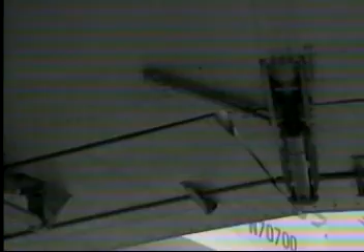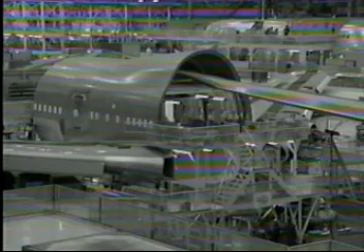Boeing company has made some of the most successful planes in aviation history. This plane, the 707, was the first of the new generation of jetliners. It first rolled off the assembly line nearly 40 years ago. In the years since, Boeing has given the world's airlines plane after plane, in a relentless succession of sevens: the 727, 737, followed by the 747, the famous jumbo jet, and most recently the 757 and 767. Now the company has decided to add yet another plane to the stable, the 777.

It's time. The world is ready for a new airplane, an airplane that will take us into the next century, designed and built by people empowered with forward-thinking ideas, by a company that knows the airplane business inside out. Introducing the Boeing 777.

Each week, there's a chance for some of the 10,000 people involved in the 777 project to meet senior Boeing executives. Today, they get an explanation of why the world needs a new Boeing airliner from Alan Mulally, Vice President of Engineering.

The airlines of the world told us they wanted an airplane bigger than a 767, but smaller than a 747. And we said, why don't you buy 767s? They said, we want an airplane that's bigger than the 767 and smaller than the 747. So we said, well, that costs a lot of money to make a new airplane. And of course, you know what they said again: we would like an airplane that's bigger than the 767 and smaller than the 747. You know, satisfying your customers is really hard work.

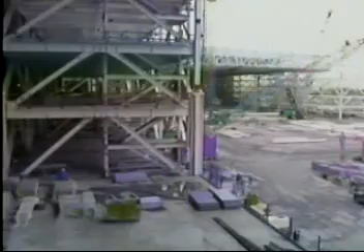Boeing has promised its customers that it will begin delivering the new planes in May of 1995. Behind that promise lie dramatically new techniques and new tools.

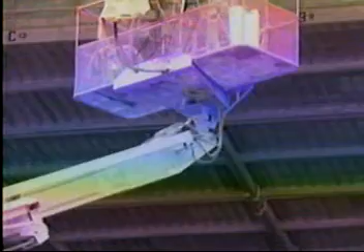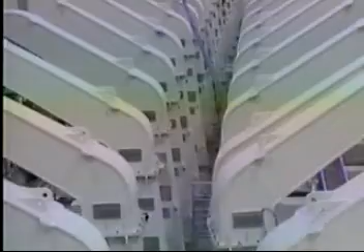This is one of the world's largest tools. When this giant rig is working, it will be capable of assembling the wing spars for one plane every 3 days.

To get an idea of how big the 777 will be, here's a smaller Boeing plane, the 737. Like the 777, it has 2 engines, but there the comparison stops. The 777 looms over the 737 when they're side by side. Its engine is the same diameter as the body of the 737.

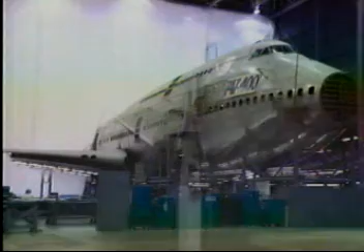The horizontal stabilizers, the flat parts at the back, are almost as long as the wings of a 737. The 777 will still be smaller than the 747 jumbo jet, although after 25 years of improved technology, it will have almost the same range and capacity.

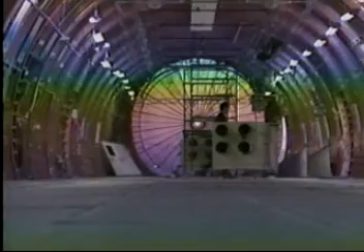With previous Boeing planes, a full-size mock-up like this 747 had to be built during the design stage. It's a plane that never flew. Complete in every detail, it was the only way to ensure that all the parts would fit together before going into production.

To build the 777, Boeing has switched to a pioneering computer-aided design method. 8 powerful computers have been linked in what is the world's largest collection of mainframes, joined together for a single purpose. The system is called CATIA.

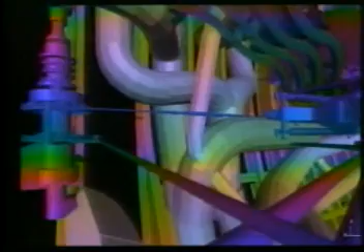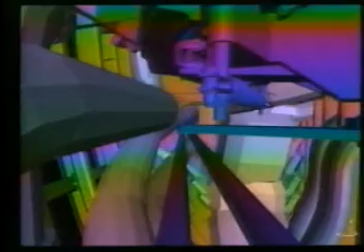Within the computer are precise descriptions of every structural component, every duct, every wire, every single fastener that will eventually go into the plane. It's called a digital mock-up because it allows pieces to be moved around, changed, and checked to see that they don't interfere with other pieces, what used to be done with a full-size physical mock-up.

CATIA is part of a major change in plane making that means engineers share the design task with manufacturers instead of finishing their drawings and passing them on, as they used to.

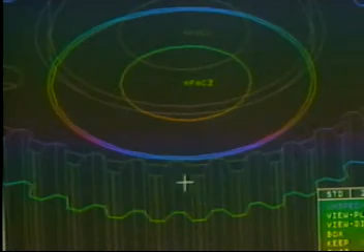The old throw-it-over-the-wall business of, here's what I insist be the case, now do what you can with it - that's gone away. But in order to really make it go away, you still wind up throwing it over the wall. You just have to accept it when it's thrown back, and that's the difference.

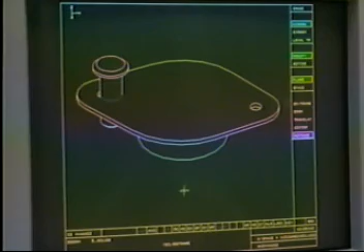The bane of every designer's life is when one of the parts he's designed gets in the way of a piece designed by someone else. But with CATIA, any interference between 2 parts shows up in red. And I do indeed have a little problem here, but it's a very small one. We haven't released any drawings yet.

Here we go with the stresses in the model in this particular area. What I did was zoomed in right here. These designers have discovered that one of their components is thicker than it needs to be in certain areas, and you can see in this area, we've got some low stresses.

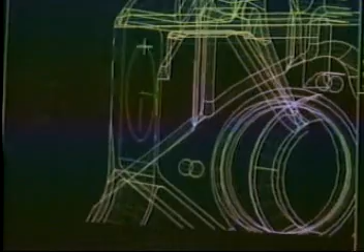Using the CATIA system, they create a hole in the piece, lessening its weight without changing its function. The system now recalculates the stresses to show that they are within acceptable limits, and works out how much metal will be removed by creating the hole. In a plane that weighs over 500,000 pounds, the small weight reduction, about 1/5 of an ounce per door, is still an important saving.

The 777 will be powered by 2 large engines. With the increase in power and reliability of jet engines over the years, there are cost and safety advantages to using 2 powerful engines rather than 3 or 4 that are less powerful.

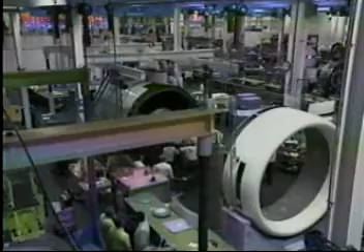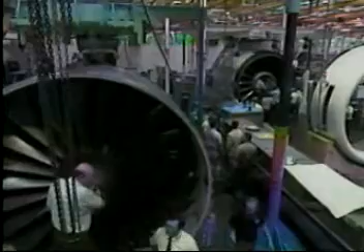The engines will be tested on the ground in 3,000 simulated flights, several engine lifetimes under normal flying conditions. Even if one engine fails, the 777 should be able to fly on the other for up to 3 hours, allowing the plane to be used on flights that cross the world's oceans.

As far as flying over water in a twin, I'm very comfortable. The airplane can fail an engine on the runway, and it's either going to stop or it's going to fly, and we designed it to do that. It can fly en route on one engine. I've probably spent hundreds of hours in these kind of airplanes on one engine, so I'm not concerned about that.

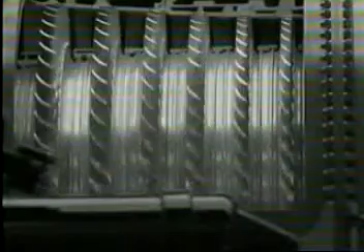The job of a jet engine is to create a thrust that propels the plane forward. Air is sucked in and compressed by these blades, then it's heated to very high temperatures by oil burners. Most of the heated air rushes out at high speed, while the rest turns turbine blades which drive compressors, helping to suck in more air. Each 777 engine will generate a thrust of up to 84,000 pounds.

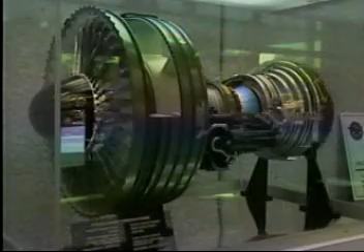Some of the 777 engines are being made by Pratt & Whitney. Today is a special occasion: maintenance engineers from the companies that will buy the plane give their views on the current engine design while there's still time for final changes.

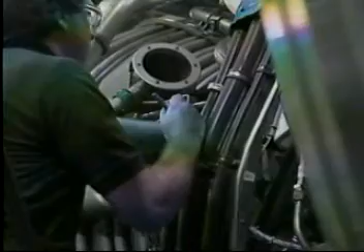The engineers will be allowed to swarm over the engine, poking screwdrivers, wrenches, and flashlights wherever they like. Their question, on a wet and windy night in Tokyo or Chicago, will it be possible to replace a part that is several layers deep in pipe, tubing, and cable?

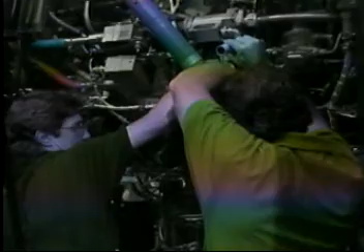This is another thing we've had trouble with over the years, these captive fasteners. When you're outside at midnight and it's 10 below zero and this thing falls out and goes through a sewer or something, you try to find another one. I've always wondered why they couldn't just put a bolt in there, it'd be so much simpler for us.

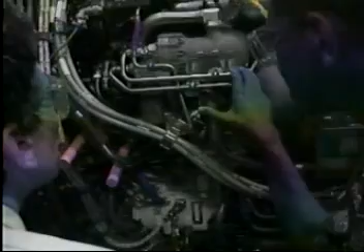For the first time, Boeing has included representatives of the manufacturers in their design process. This team is responsible for designing and building the passenger doors, which are to be manufactured by a Japanese company. When it comes to discussing schedules, materials, or manufacturing methods, the manufacturer's input can smooth the transition from the drawing board to the factory. In some ways, design-build teams are a throwback to an earlier era of plane making.

If you go back to the early airplanes that Boeing built, the factory was on the bottom floor, engineering was on the upper floor. Both manufacturing and engineering went back and forth. When there was a problem in the factory, the engineer went down and looked at it and said, well, you better do this. The entire design department was within 50 feet of each other. As the scale went up, that gets harder and harder and harder.

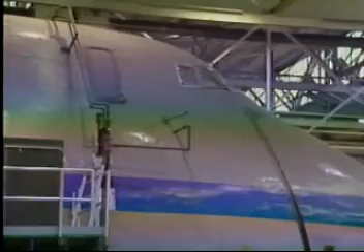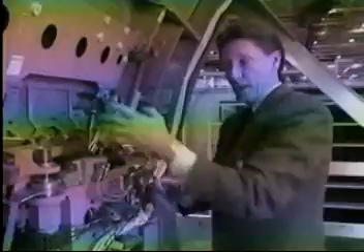The fresh approach of the design-build teams means that every component of the 777 has benefited from a design rethink. The traditional Boeing doors, actually, they come in and twist sideways and go out the hole sideways and invert themselves. And what we found on this new airplane program is that the forces to do that are kind of getting up there, especially on a door as big as this. And we thought we'd look at a new door concept.

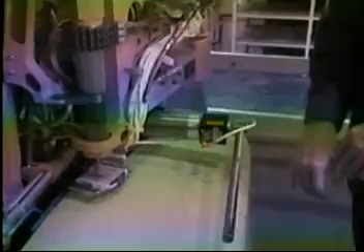On this concept, all of the weight of the door is hung on this hinge, which is bolted to the airplane, and the loads are vertical, so the hinge can take all the load. If you can understand, if this were tilted like so, you'd be pushing the door uphill, so we don't have that problem. And we have some simple and efficient bearings, so the total load to push the door is actually quite small and can be pushed open with one finger.

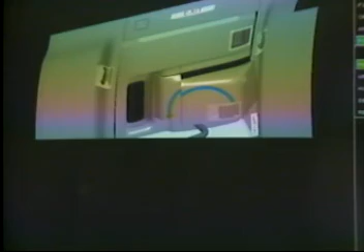In the early stages of door design, Gaffney realized that with 8 doors on the plane, each having about 1,000 component parts, it would make sense if the doors had as many parts as possible in common. But this wouldn't prove easy.

What we recognized early on was that the key to make all the parts common was to make the hinge common, notwithstanding the shape of the body was different. I put one of my best guys on it, put him in charge of hinges, and asked him to go research and come back and show me how they can be common. He came back after 2 months and said they couldn't be common. I did a little management ploy. I said, fine, who do you recommend to follow up on this, and we'll let him give it a try. With that, he said, well, maybe there's something else I can look into. And lo and behold, it took him another month, but he had that dedication, and he pulled it off.

Unfortunately, after he was done, we changed the contours of the airplane for better aerodynamic performance, and he had to go back and do it again. But he knew he had done it once. The second time around took him about 4 weeks, not 3 months. Then, of course, what did we do? We changed the contour again. But by now, he knew the techniques to use, and he got the hinge to catch up in a week. And that was the key.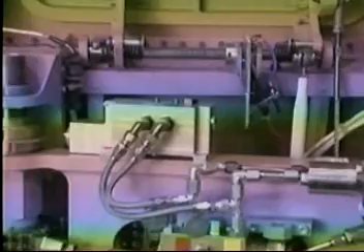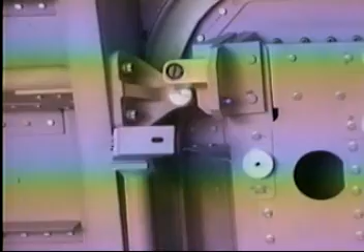Right now, not only is the hinge common, but all the mechanism is common. Indeed, 98% of all the mechanism of the door is common. So it was a critical design discovery, a critical design implementation, and fortunately the guy had the smarts to pull it off. Although the 777 is over 50% heavier than the 767, these new techniques mean that in man-hours it will take about the same time to build as the earlier plane.

We found out that a lot of the cost of the airplane was not in building it, but in rebuilding it and rebuilding it until we got it right. So when we started off on this new door design, I and my crew went up to Everett, where the last airplane was made, the 767, and we went through all of the changes that happened on all of the doors on the 767.

Matter of fact, we looked at 13,341 changes, cataloged them as to what the cause was, but more important, we looked at the new initiatives we've got on this airplane program, and we picked what initiative would solve that problem, would obviate that mistake, would make that mistake not happen. We also assigned a dollar value to that mistake. On doors alone, according to our assessment, $64 million was spent just in changing the design. We felt that if we applied the new initiatives in the order that these costs come up, we could save all of that money on these doors.

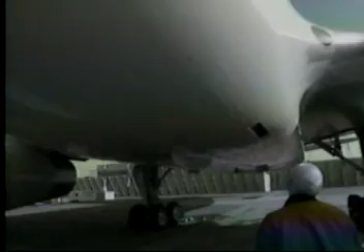For the time being, since the 777 doesn't yet exist, he's currently logging flight time on a Boeing 757. It's part of a program to try out the new flight control system that will eventually be installed in the 777. The 757 is a much smaller plane, but it's been fitted with the 777's electronic system, called fly-by-wire, which will carry the pilot's instructions to the flaps, rudder, and engines.

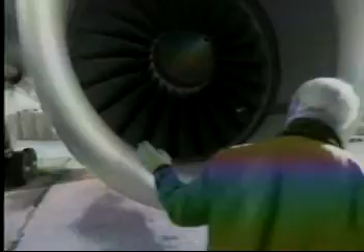During today's flight, they'll be carrying out a number of takeoffs and landings to feel how the plane settles into its landing position using the new controls. Well, pumped up here, you might not do that. I'm trying to remember what we saw in those early flights. I don't think it was that high. No, they said 65, 70 pounds at the most, and I had 105 pounds. Yeah.

The plane has been converted to dual control, the fly-by-wire system on the pilot's side, with the 757's conventional system controlled by the co-pilot. The main differences are some of these little instruments that are put on here, and the biggest difference for fly-by-wire is this and this. This is actually what turns the computer on and off for fly-by-wire. Flight instruments 3008, parking brake.

The 757's own controls use the traditional system of cables and pulleys stretching the length of the plane. The joystick pulls on the cables to trigger hydraulic devices that move the wing flaps or the rudder. Fly-by-wire replaces this cumbersome physical system with electronic signals, which are processed and interpreted by computers. The result should be a smoother flight and a quicker response on landings and takeoffs.

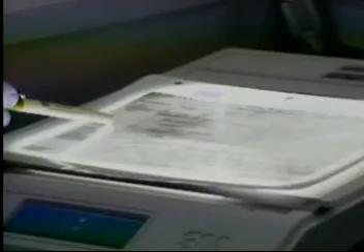This is one of the regular meetings of all the 777 chief engineers. With a brand new plane, every detail is scrutinized by this assembly of the world's top airplane engineers. Scheduled to last 6 hours, this meeting still runs over schedule. Constant dialogue and debate are punctuated by moments of boredom.

And that's the part that bogged my people down for a long time, and I didn't understand. So the overall load is there, and I think we understand it, the stress understands it. But if you look at one little particular part and want to know how much load is on that through all the paths, nobody's got the information. They're working on it. So we've got to have some logical way of saying this is about what it is that we can show to the FAA.

Pressure to get the costs down also dominates the meeting, but it mustn't be allowed to jeopardize the safety of the plane. When we look at a trade, or what is apparently a trade between safety and economics, it very rarely is a black and white issue. You look at it with a lot of things in mind, and you do it as carefully as you can. You try to back up, I will say, to the most fundamental issue of all.

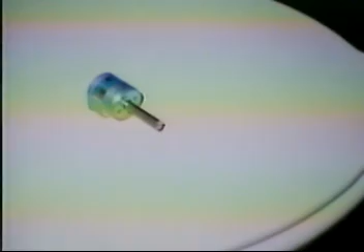So we went to work. We got the mechanical designers, the electrical designers, and the toilet suppliers and makers of toilets and toilet lids, and we got them together, and we started to work on a small device that we could put on the back of the toilet lid. You can see this device right here. This little device could go on the toilet lid, and we could put another piece out the other side that could hook onto the toilet seat. And we could absorb the energy of the toilet lid and the toilet seat before it hit the toilet bowl.

Now, that's a neat invention. But that's the first step. The second thing is it needs to work all the time. We don't want it stuck open, and we don't want it stuck closed, because that could be even more irritating than the big bang sound.

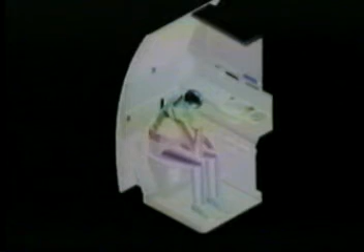So we tested it. We got some prototypes, and with our suppliers we made a toilet seat that we could automatically open and let the lid and the seat fall. As of last week, we have completed 670,000 cycles of this toilet seat going up and down, and we have got it down to 0.7 of a pound for each device, and it's reliable, and it looks like it can be installed cost effectively. That's what airplane design is really about.

With the design process well underway, Mulally and Condit suddenly received unexpected news. The board of the Boeing company set in motion a chain of events that started with Condit.

I changed jobs. That's something I've done more than once in my career. On the 31st, I got elected president of the Boeing company. I was called in by the bosses, people I respect and work with, and they told me that Phil was going to be the president of the company.

And I was really excited that Phil was going to be the president, like everybody else. So I leaped from my feet, reached across the table, grabbed his hand, and said, 'Congratulations, Phil.' Leaped across the table the other way to Dean Thornton, who now works for Phil, who Phil used to work for, and shook his hand and said, 'Congratulations, Dean, great choice on picking your boss.' Then I sat down to get ready to leave, thinking all the time that it was really terrific that they would take the time in their busy day to let me know that my boss had been promoted.

And with that, they said, 'Alan, we would like you to manage and continue to lead the 777 program.' And my reaction was, 'What? I'm really busy.' One of the many things keeping Mulally busy was a major component of the plane being manufactured in Australia by a company called ASTA.

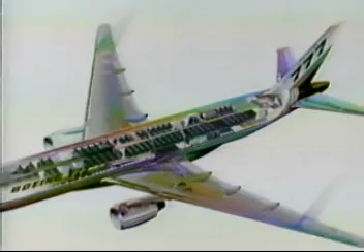ASTA had the contract to build the rudder for the 777. The rudder is a movable piece that stands vertically at the back of the tail. It needs to sustain strong air pressure across its surface as it moves from side to side to change the direction of flight.

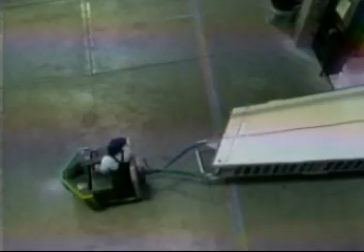ASTA has an October date for baking their first 777 rudder in a large pressurized oven called an autoclave. It's a bloody big job. It's a very large piece of the plane, bigger than some airplane wings. It's made of carbon fiber over a honeycomb core.

Earlier in the year, there had been some concern about potential problems caused by vibration. The rudder team in Seattle has now decided to change the design of the rudder. For the ASTA people, it's very worrying.

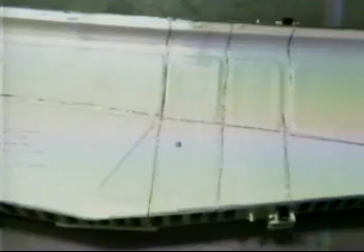They ran all kinds of extensive tests and found, for instance, that the first problem was a harmonic vibration, and to dampen that they put on some counterbalance weights. This time, they needed some additional load stiffness in the rudder, so they've increased the thickness of the plies on a panel like those, the two skin panels, and some of the internal structure.

Don't hit the bloody thing.

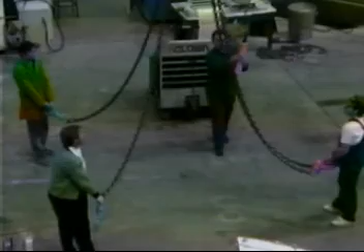The ASTA manager in charge of the project has begun to lose patience.

I was cheesed off to blazes because of this change, and I'm not exactly that happy today, because we set out to achieve a whole series of things with this particular rudder skin. We'll achieve most of them, but what worries me a little bit is that the configuration will change, and it's going to change fairly dramatically, and we still have to deliver on schedule.

We've got a requirement to deliver this rudder in the middle of next year, and if we're late on that, it puts Boeing in a bind, and we don't want to do that if we can possibly avoid it.

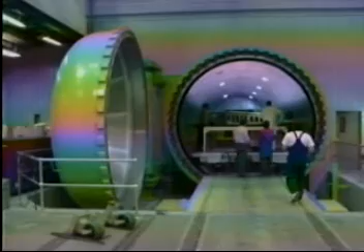At this stage, before baking, the rudder material on the rig is soft and pliable. After baking, it will be as solid and tough as aluminum, but much lighter. All this depends on everything going as planned.

The rudder is to be baked at a temperature of 177 degrees centigrade for 7 hours. These thermocouples are temperature measurement devices being installed all over the rudder to make sure that every part of the rudder skin reaches the right temperature for hardening and toughness.

It's the first time they've baked such a huge piece. The evenness of cooking will be essential. Over the course of a weekend, the rudder is baked and left to cool.

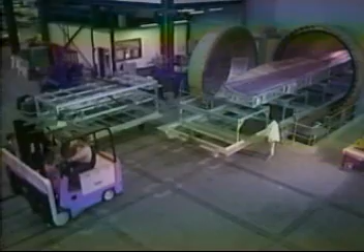Then the moment of truth. It's ready to be wheeled out, covered in its plastic bag and paper coating. The question is, has it retained enough of its intended aerodynamic shape within the required accuracy of a few thousandths of an inch?

Surveyors' instruments, theodolites, are used to measure the exact position in space of a series of target reference points. Some of the points that the engineers thought might have moved from their original position have hardly changed at all.

But there is a problem. As the computer data from the baking become available, it turns out that 4 of the most crucial thermocouples have not worked.

The thermocouple problem doesn't seem to have affected the shape, although they now need to look at the other side, a task that requires a coordinated effort by the whole team.

Bit more support. Take it straight down. You want that edge over the edge?

Yes, we're just getting a kind of a pretty picture of it right now. So you get it all trimmed off and you can index everything carefully.

It looks pretty good. I'm still nervous about it because I've got to make sure that the shape is right. So when we get all the trim off the edges and lay the templates on there, I'll probably sleep a little better.

On the 29th of June next year, we will be matching the tab to the rudder in a final assembly. The following day, Tyler addresses his group of workers in a generally optimistic way.

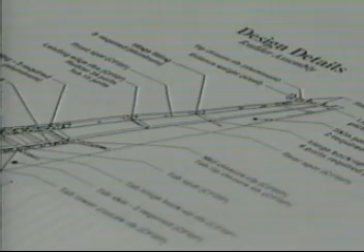Okay, now that we've got rid of the rest of the team that participated in building the skin, what we really have to address is the effect of all these changes brought on us by Boeing. Lovely company though they may be, they've given us a real problem building this rudder to schedule. It's a pain in the neck right now because we've said we must have that engineering by the 1st of November to give it to the subcontractor.

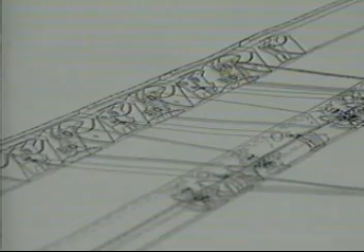But let's assume we're not going to get it. What can you do to achieve it? Sure as God made little apples, we're going to be late. Have they given you feedback on our letter telling them how we'd be able to save the schedule? Apart from some maniacal laughter on some of our requirements, no, they haven't really.

After the meeting, Tyler phones Boeing to report on progress. It's something that I'll get to you so that you can shoot it into Pete Van Vogt.

His main contact there is not pleased to hear about the broken thermocouples. Next time you might want to test them first. Well, we did. Took the part. We did, that's the problem. And the reason why it didn't work is something we've got to finally determine. It's not going to be easy, but if we do it right, I think we can get there.

We love you most of the time, but in this case, we don't love you as much as we should.

A week after the mixed results in Australia, the Seattle team responsible for the tail of the 777 meets to discuss what has happened. Begin evaluating the spar changes, and then I'm going to head down to Australia and face the teeming masses who aren't happy with this.

What we're playing with really is the comfort level of the people involved. Calculating these stiffnesses is kind of black magic. For the members of the team in Seattle, it's just one among a number of pressing problems. But for the Australians, it continues to be a major headache.

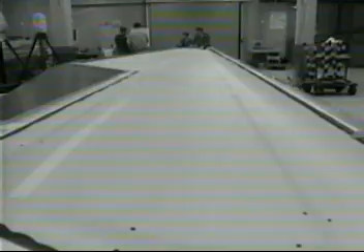Now, this is the first class section. In the white heat of designing the plane, some of the 777 team still find time to think of the customers, the airlines who buy the plane, and the passengers who will fly in it. With Alan Mulally's new responsibilities as team leader, he had to forsake engineering for a day and act as tour guide to Lord King, executive chairman of British Airways.

Now, Lord King, sit down here, and I want to just point out a couple of impressions to you. One thing: the seats are real, but the rest of the interior is a mock-up made of wood and plastic, itself costing $2.25 million.

Let's move on back. Thai Airways came in here one time and saw this 7 abreast and they said, if you put 8 abreast in here and 7 rows in here, we could have 45-inch pitch. Some people believe they like this space better than their personal space that way, especially for long flights. Long flights is key, where they can tilt you up. And it's totally revenue neutral to us - it's 56 seats, one way or the other.

Okay, all right, let's look at the back, where the passengers travel. This right here is bigger than the 737s and 757s, because that 10 abreast we put in the back - we decided that you thought the 767 was an acceptable level of comfort. Another reason for picking the 5 inches is that when you put 10 abreast in the back, those are the same seats everybody has in their 737s and 757s, and everybody's accepted that and feels that's good. So they're not going to feel like anything was taken away from them. So that flexibility is really the key.